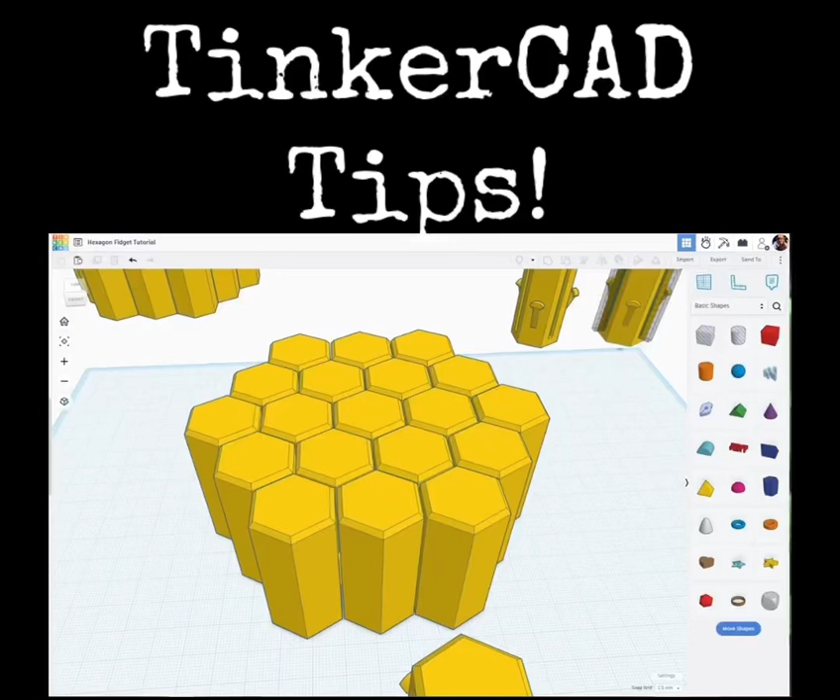This is part 4 of the tutorial on making these hexagon fidgets. In the last installment, we had been putting this together. This is going to be the cell that we're going to be making the fidget from. I have everything grouped together, with 3 ears around each side and 3 slots.

Let me show you what this is going to look like. If I take a duplicate and nudge it over, we'll move it until there's a small gap in between. Let's change the snap grid down to 0.1.

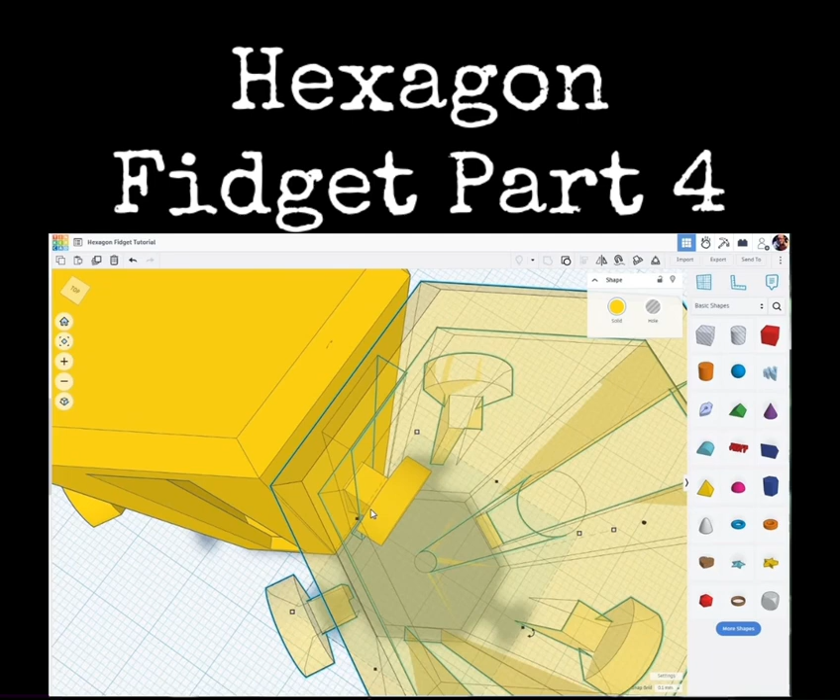Now if I make that transparent, you can kind of see what's going on here. We want to make sure that when we're designing this, there are tolerances or gaps between the slots and these ears that stick out. There's a gap between the hexagon and the back of these little ears or tabs as well, so everything will move freely, and when you print this, you don't want anything to stick together.

These have been designed in such a way that they should print without any supports at all. Obviously, when you get a bunch of these together, you wouldn't be able to do supports.

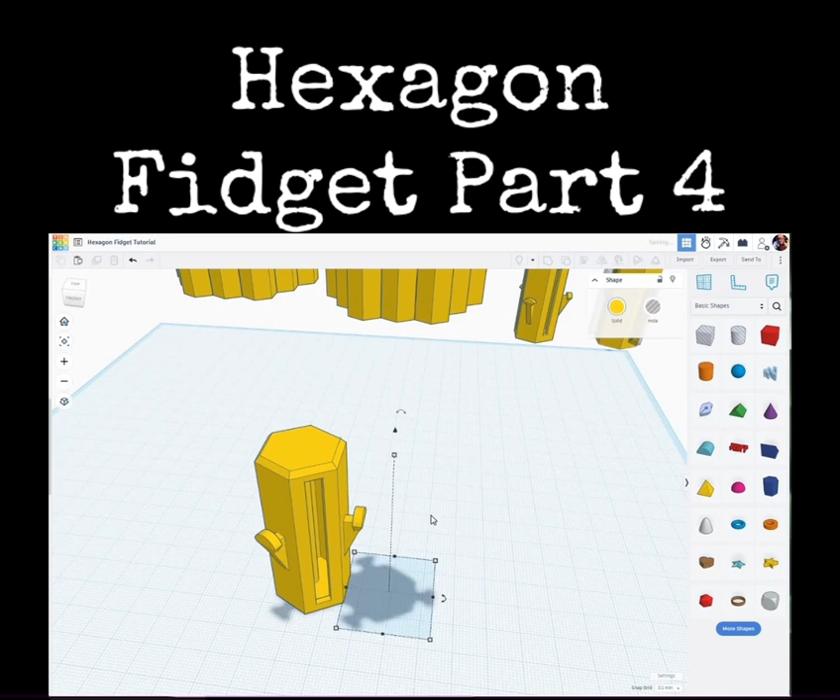Now let's do the part where we're going to create the larger fidget. If you notice on this one, there's 5 across the middle, then 4, then 3. So let's do a little bit of wave duplication. Let's bring this one over here.

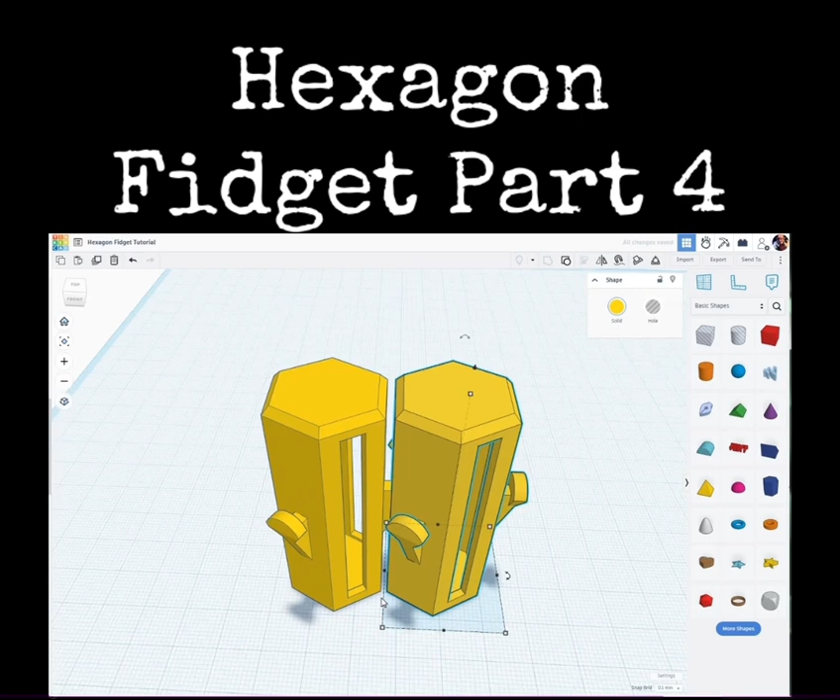I'm going to grab a duplicate of that, and using the cursor keys, shift nudge this over here till I have a proper gap in between the two. That's a little bit too much - there's just a little bit less than 1 millimeter there.

While that's still selected, I'm going to hit Control D a couple more times. Let's make one more.

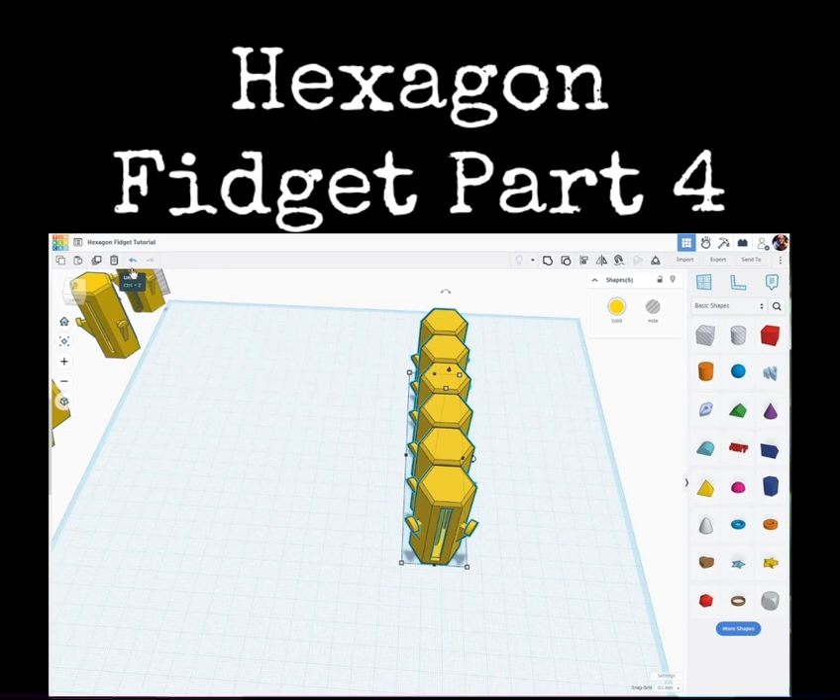Now I'm going to go to the side here. I'm going to grab all 6 of these and hit Control D to duplicate again. Now these, I'm going to begin shifting to the left and down a bit.

Let's zoom in here and make sure it's centered between - you see the tip of this here we're looking at? Let's change this to off. There we go. Let's shift nudge these over, and again we want to make sure there's a big enough gap in between each one of these cells.

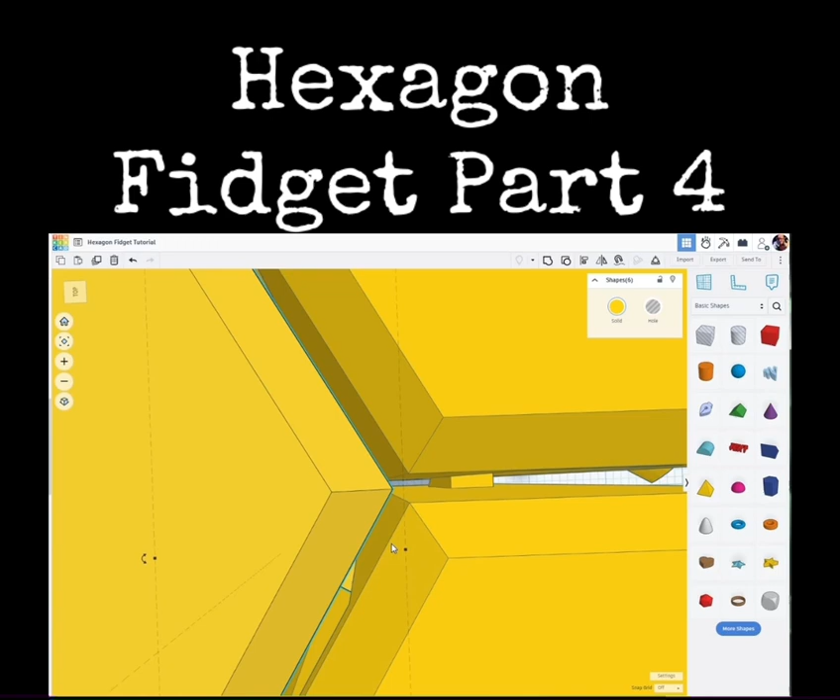I'm going to zoom out, and while those are still selected, don't select away, I'm going to hit Control D a couple more times. I think that should be enough.

Now we're going to begin deleting a few that we don't need. Down the middle here, I need 5, so I can click on this one and get rid of that. On this row, I need 4. This row, I need 3. This row, I need 4, so I can delete those 2. And I can delete all of those.

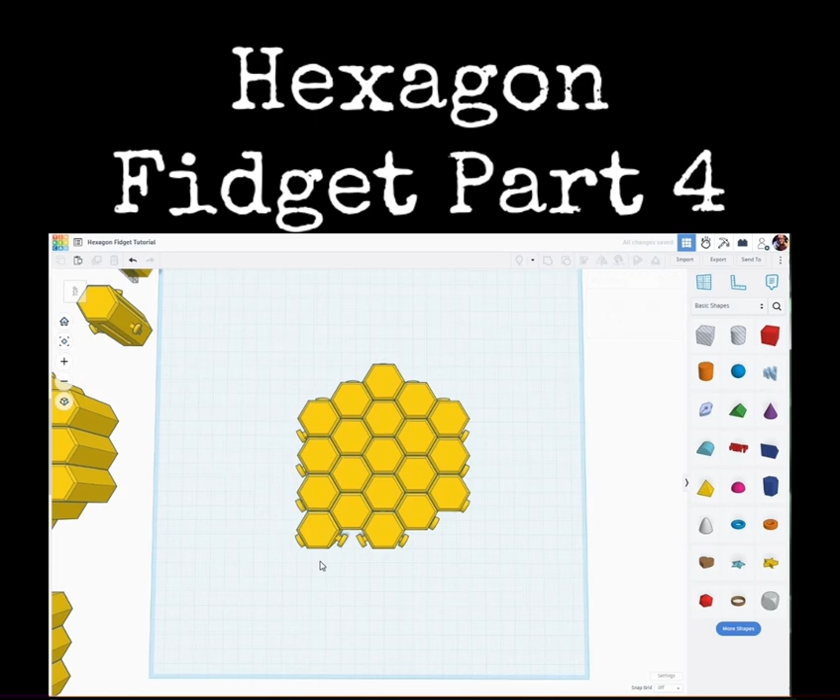All right, so now that's what we're left with, but notice that on these outside ones, they have the slots and tabs on them, and we need to remove those. So we're going to begin using the hide-unhide feature. I'm going to zoom out a bit.

I'm going to lasso select all of those. I'm going to shift deselect this bottom one, and on this bottom one I need to get rid of these 2 tabs and this slot. First I'm going to deselect it. While the others are selected, I'm going to hit Control H to hide.

I'm going to click on this one and ungroup. I'm going to click on an ear and delete that. I'm going to delete that, and delete this slot. I'm going to reselect everything and regroup it. Shift Control H to bring everything back.

We're just going to keep repeating that. I'm going to grab everything again - notice on this one I need to get rid of just one tab and one slot. I'm going to deselect that cell, Control H to hide. I'm going to select it, ungroup, delete the tab, delete the slot. I'm going to reselect everything and regroup again. Shift Control H, bring everything back.

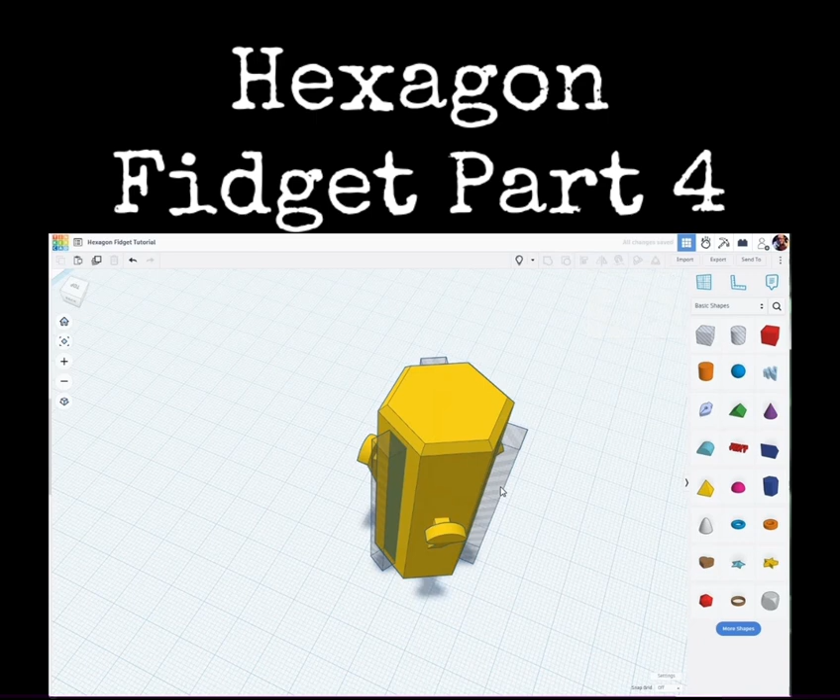Select them all again. This one, I have two slots and a tab, so I'm going to deselect it, hide those others, ungroup, delete that and delete that, and regroup. I'm just going to keep repeating that same process, so I'll do that real quick and then come back.

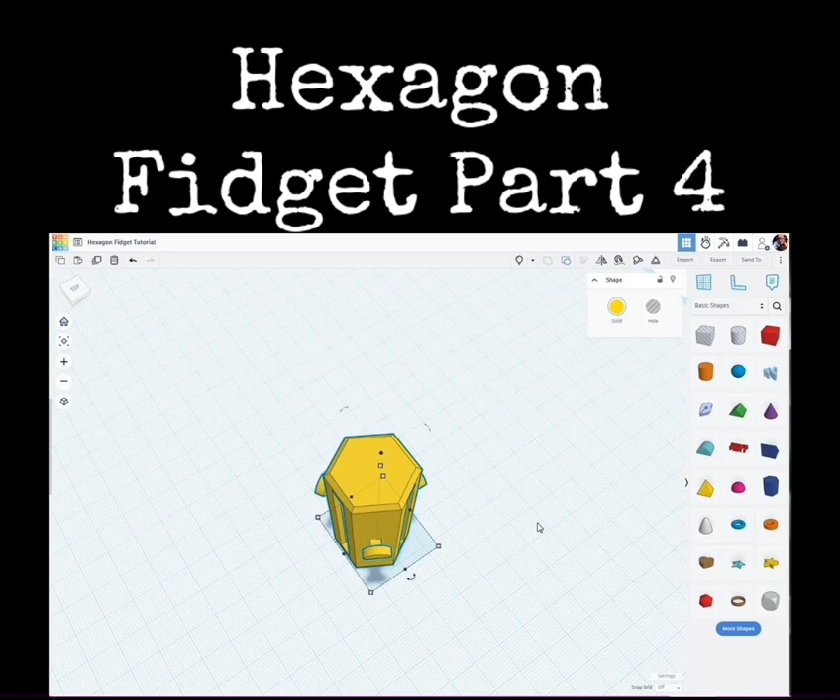All right, now we've removed all of the extraneous slots and tabs off of all of these. We can look at any one of these - we'll zoom in and make this one transparent, for instance. We can see down inside of there, double check that all of our tolerances are going to work when we print this. Look at this one here, make that transparent.

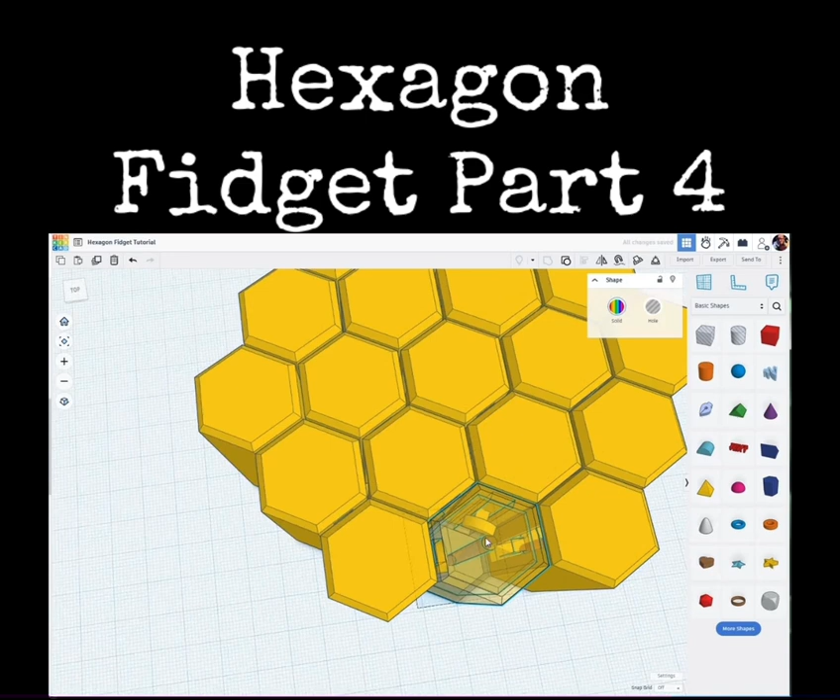Everything looks good. So now we can just simply select all of these together, do a quick group, and when it resolves, it's going to look like this, all ready to print. We can look down on top of these and see all of those slots and tabs.

So there you have it. I hope you guys were patient and enjoyed all 4 parts or episodes of this particular tutorial.